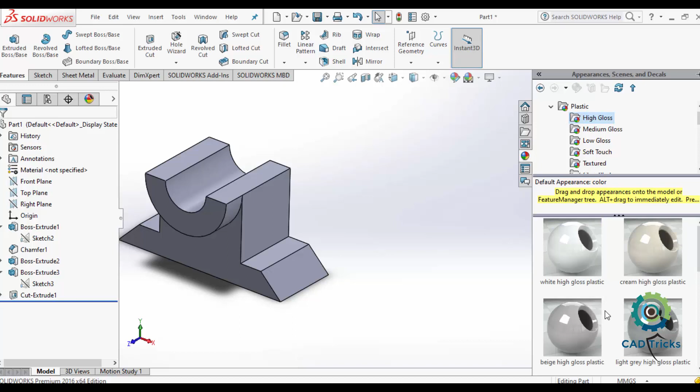Today we will make this example on Solidworks by using some features like extrude, chamfer, and cut extrude. It's a very good example that you can practice on. We'll also make an appearance and choose a color for our 3D model. It's just a simple practice. So let's start.

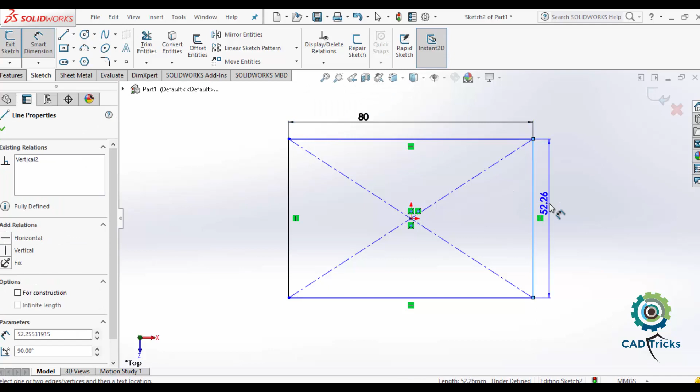First, I will choose a plane that I will work on as usual. Here is our 2D sketch with dimensions. I will make a sketch on the top plane, then choose a rectangle from the origin and draw it 80 millimeters by 30 millimeters.

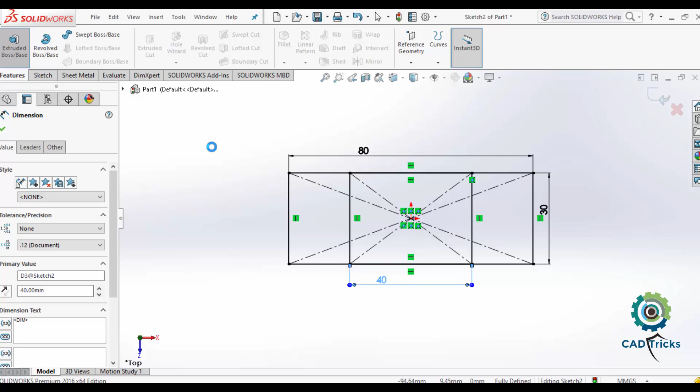Here I will draw a small rectangle, 40 millimeters, in the middle, and I will go to features and extrude all the rectangles, the big rectangle and the small rectangle.

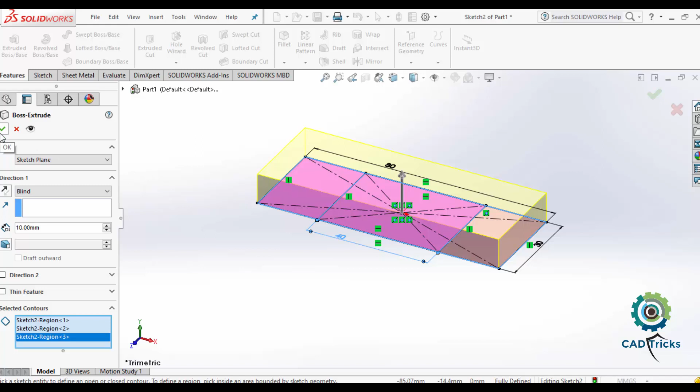I will choose these three parts, then choose OK.

Then I will make chamfers here and here, 45 degrees and 10 millimeters chamfer.

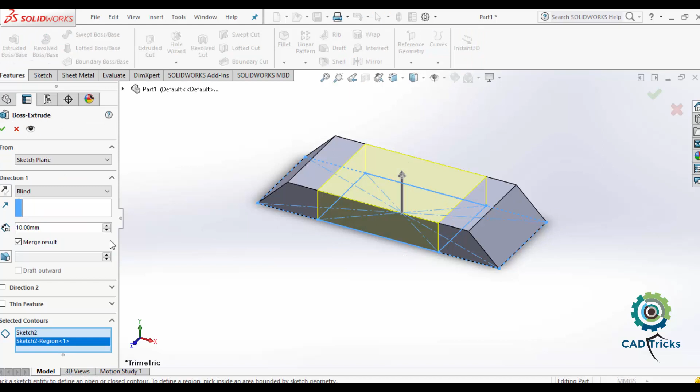OK. Then I will draw a sketch for the small rectangle for our last sketch, 40 millimeters height.

Then OK. I will draw on this surface a sketch to make the circles.

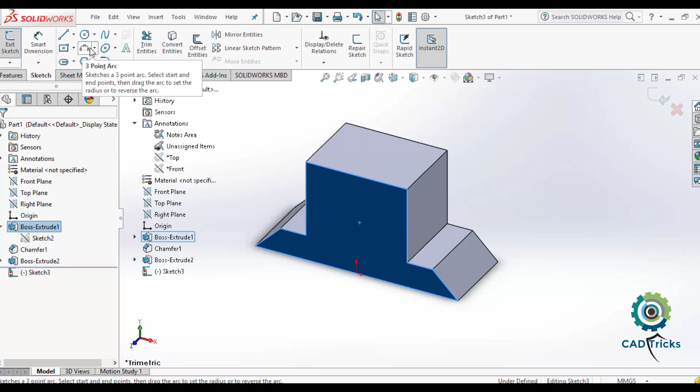I will draw a center line first to follow, then draw a circle from this midpoint to the other, then choose convert entities.

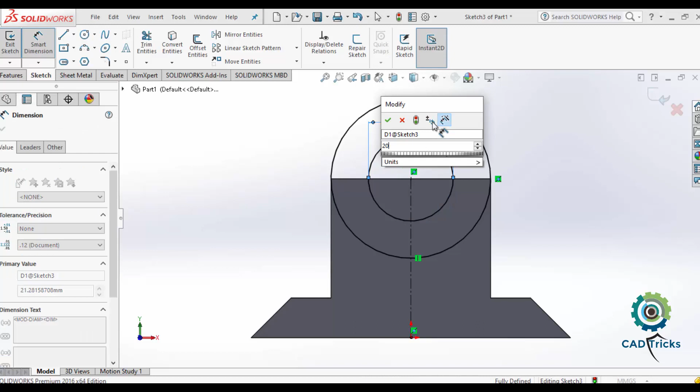So I will make a small circle first, which is 20 millimeter diameter. Then I will make convert entities for this shape, then trim the extra lines.

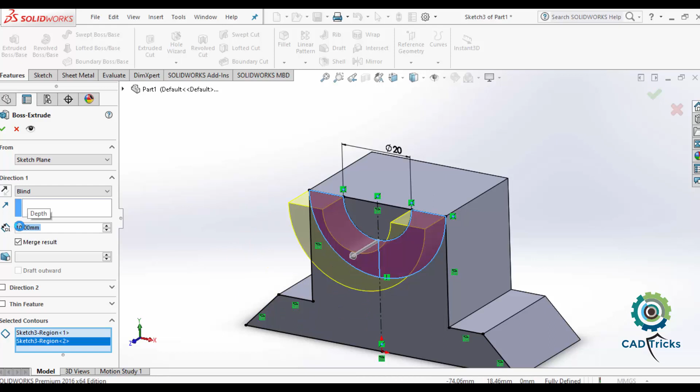Now I will make an extrude for these areas by 10 millimeters, and for the same sketch I will make a cut extrude through all, and OK.

Here we are. Now we got the shape with all dimensions. Here it is.